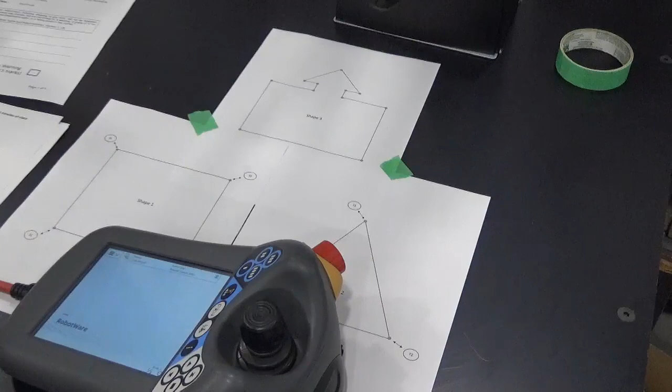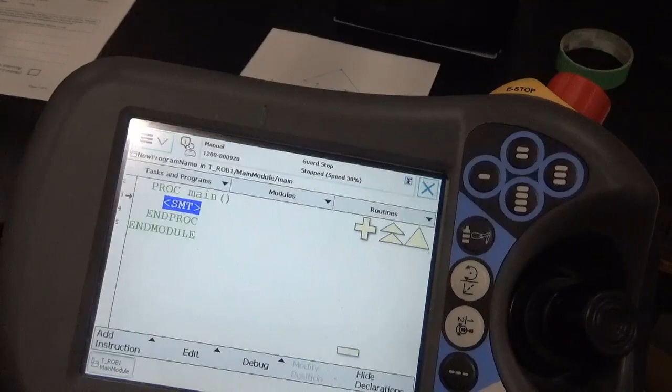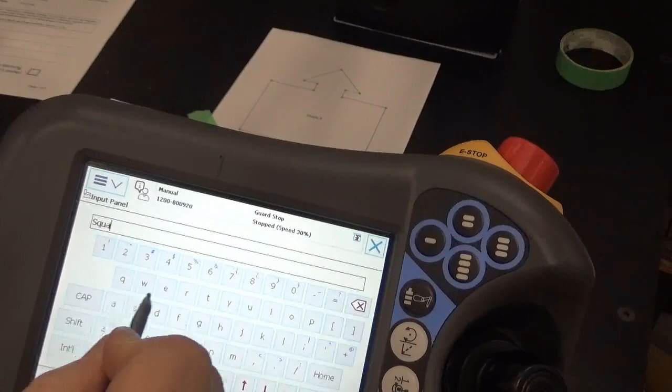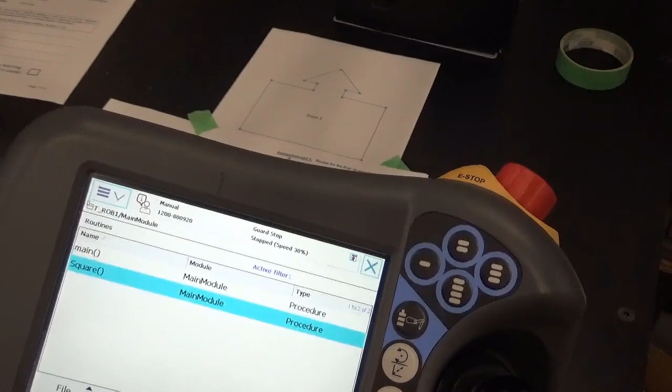Okay, so this is going to be a run-through of lab number 3. So, as it calls out here, we are going to start with selecting the program editor, selecting routines, and then file and create a new routine. This new routine is going to be called square. And then we're going to say show routine. The routine is going to look like this.

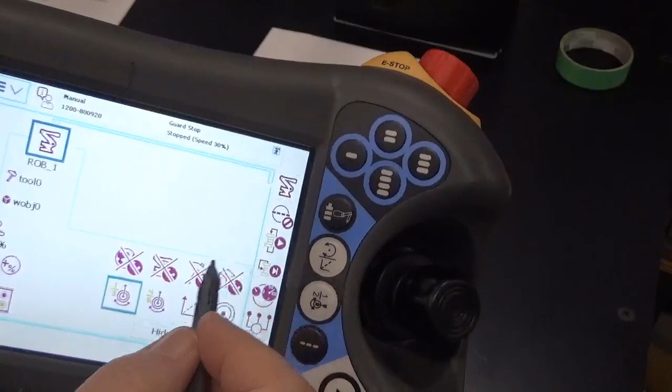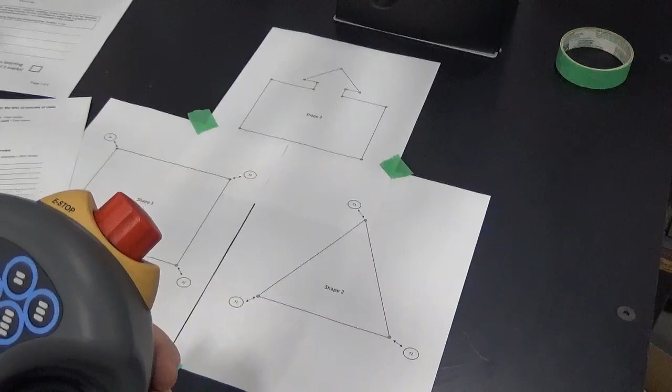Okay, now next we have all our shapes taped down over here. We are going to jog the robot around to make sure we can actually reach all the points on here. So let's go into our jogging menu. I'm going to make sure I am on no increments. And I'm going to start off, as always, by breaking the wrist to avoid singularity. There we go. My joysticks were all locked right now; it was left unlocked from the last lab. So I got my wrist down in a good position now.

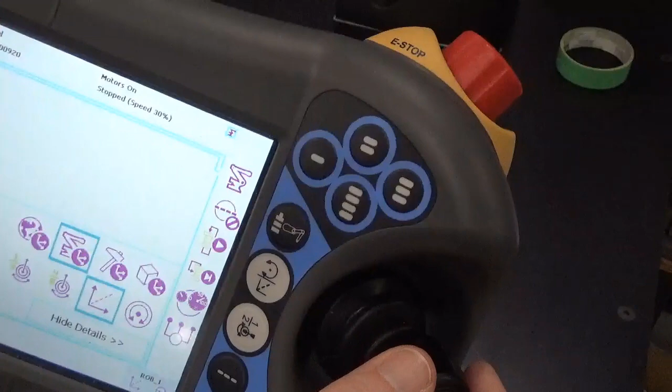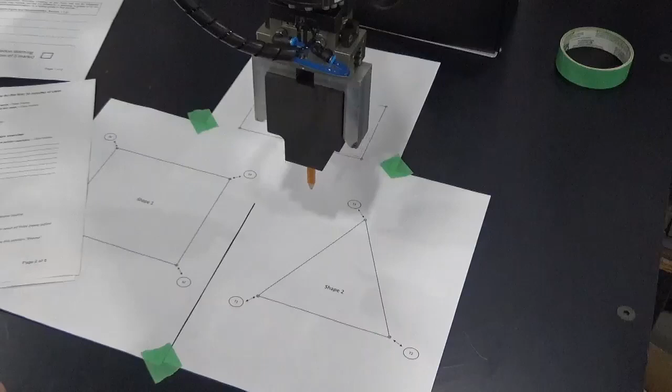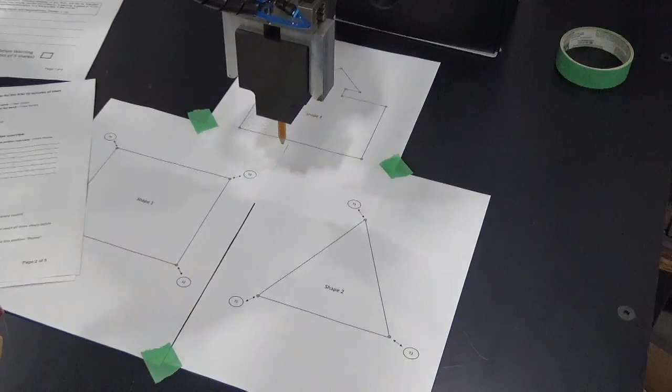I'm going to switch to linear. And I'm actually going to bring the robot over here and just see if I can actually reach all the different points that I want to try to get to. So could I actually reach as far as I want to go? And what we're going to see is that's about as far as I can go in Y. This is about as far as I can go in X. So I've actually taped these things in a spot that I can't reach.

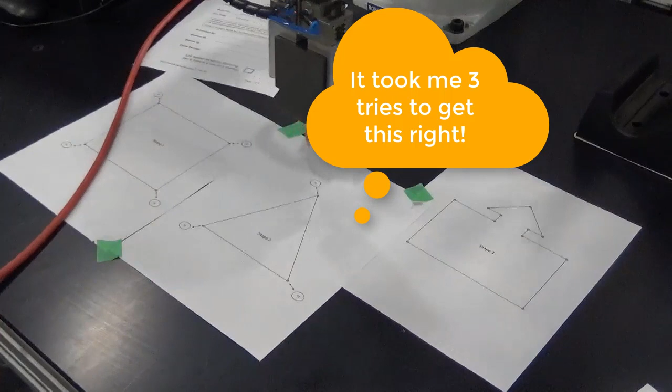So let's make sure that is fixed. Okay, that I can actually reach. So there we go. I can actually reach everything that I need to get to. Okay, so that's good. So let's carry on from here. Next thing we're going to do is define a home position. A home position that's good for all of these shapes would be something that is up above all the shapes and kind of centrally located. So let's call that right about here. That looks good. So I jog to that position, and now I'm going to create that home position.

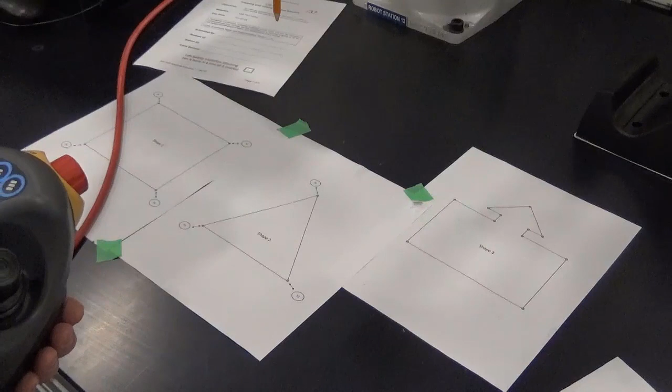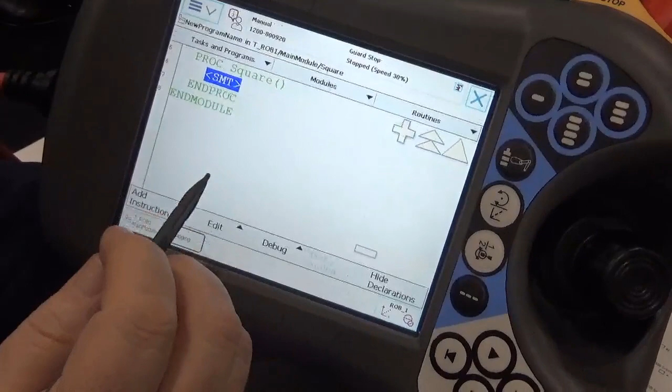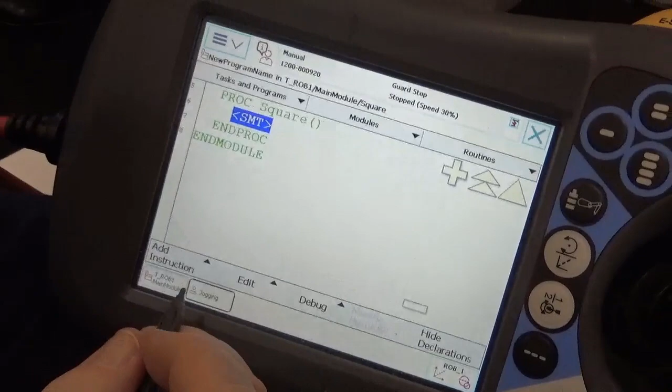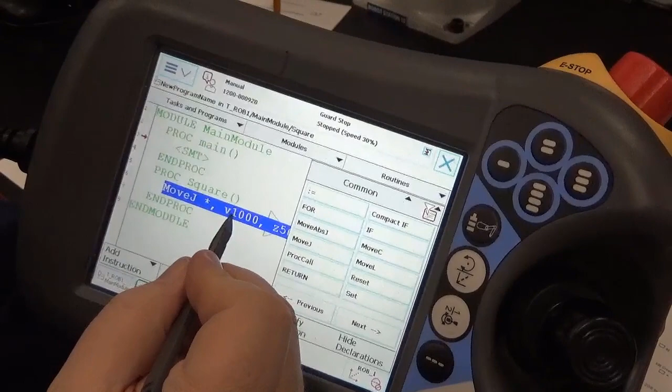In my square routine, I'm going to go back to my main module here. So in my routine that is square, I'm going to create this position. I'm going to do a MoveJ to this position and call it home. So I'm going to say add instruction, MoveJ, and then I get this coming in. So you'll see this, MoveJ star, the default speed that it does is V1000. See how I can select each little part of this. It's kind of tricky to do, but you can see that's the tool, that's the zone, that's the speed.

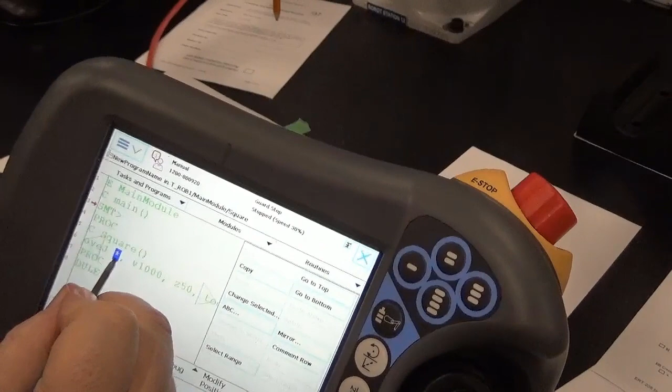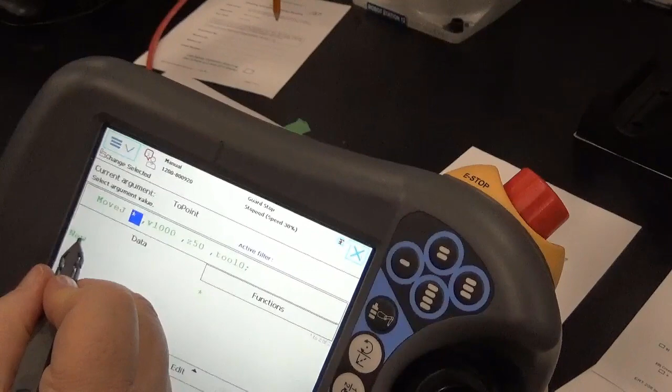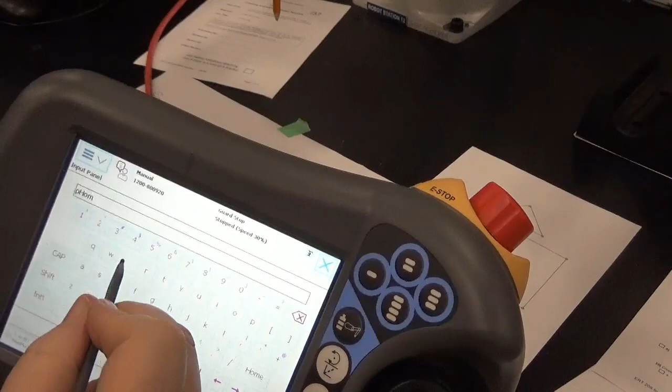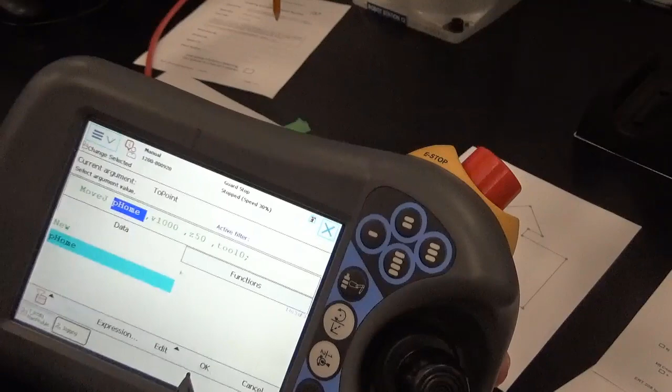I want to change this, so I selected that star right now. I want to say change selected. So I want to say this is a new. And when I create a new, it's basically going to create this point that I have right now. The default value is always going to be P10. I'm going to change that, and I'm going to call this P home. So remember to always rename your points as you create them. So this is now moving to P home, which is basically the point that I am at right now. And that is in there right now.

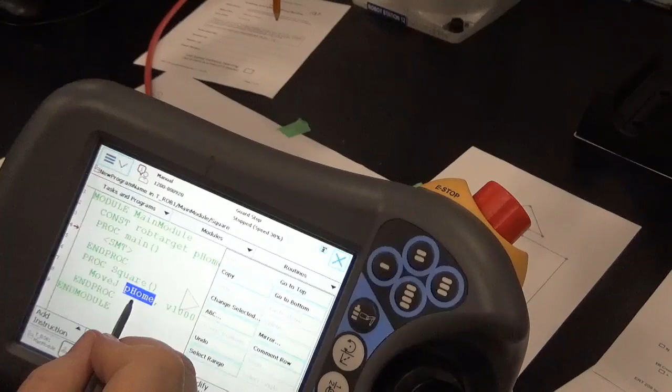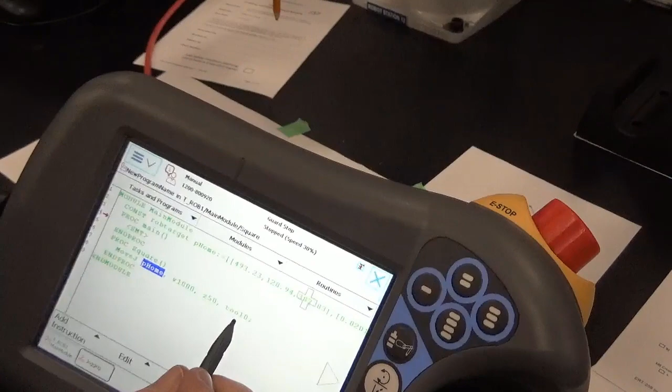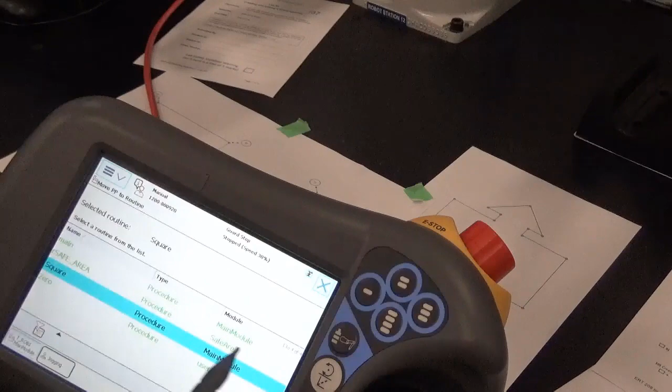So if I now go to my routine, if I say debug, I'm going to crush this down a little bit so I can see it better. My square routine now has one line of code in it, which is a MoveJ to P home, velocity 1000, zone of 50, tool 0. So let's see what that does if we actually run it. So if I jog off of here, and just jog over to here, I'm going to now say debug. I'm going to do a PP to routine. What routine do I want to go to? I'm going to say square.

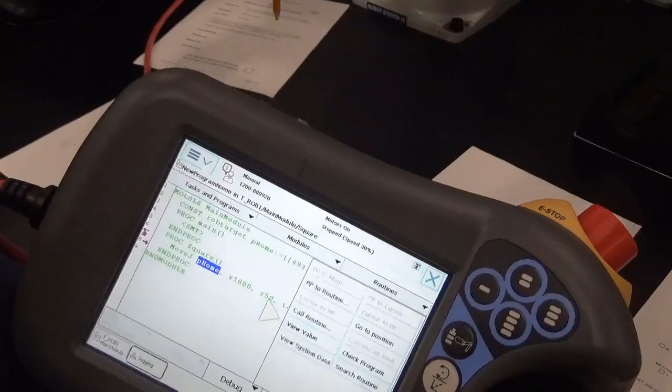I'm in my square routine now, and I'm going to play this routine. I'm just going to play it by stepping through it first. Stepping only goes one line at a time. So I'm going to say go to that point, and it is now moving to my point. You can see the little robot icon indicates where you're actually at. The pointer icon shows what the next line to be executed is. So it moved to that home point. And that's basically the way that we program this. We're going to repeat that process for all the different points on the square.

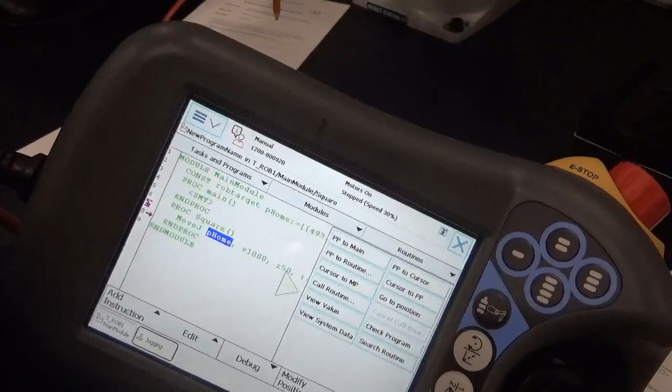So that was our home. The first one we're going to go to is going to be called S number 1. So we're going to jog over to S number 1, which is going to be over here. So in our linear mode, we will move downwards. I'm going to go about an inch above the paper.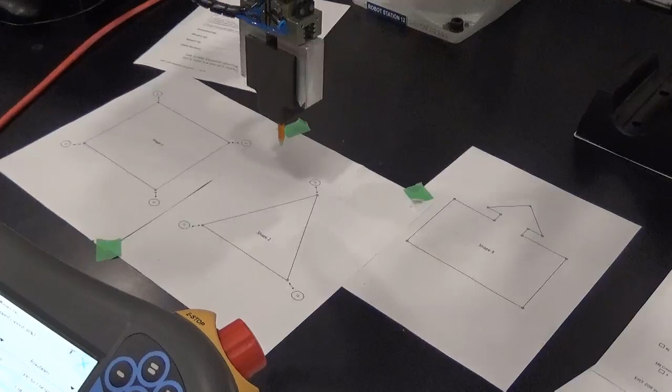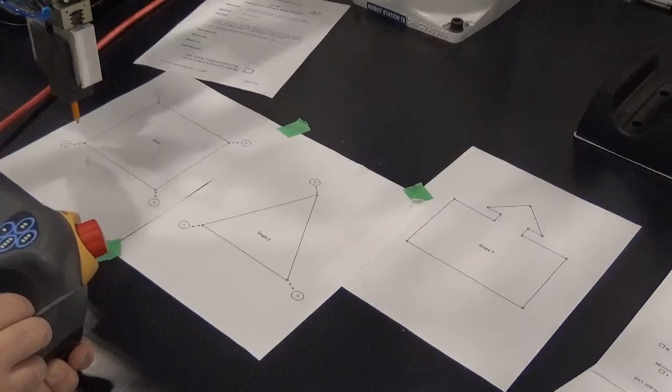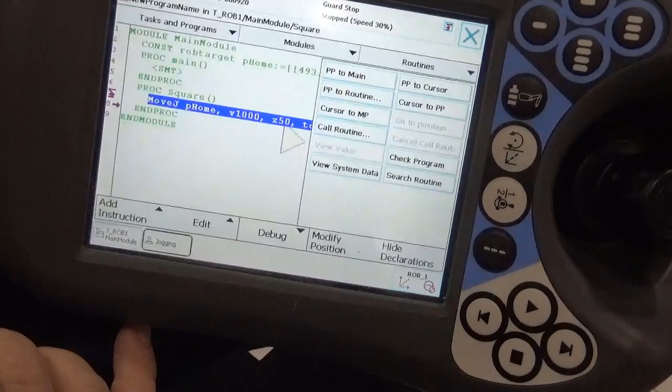And jog over so I'm above S number 1. Eyeballing pretty well. And then what I'm going to do is I'm going to get my cursor here on my code, which is now move J P home. I'm going to say add instruction. I'm going to do a move J.

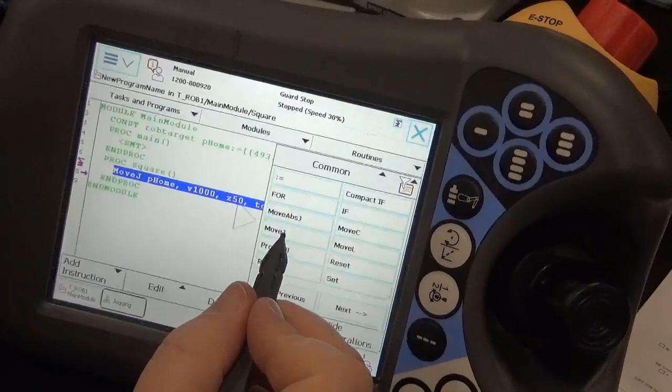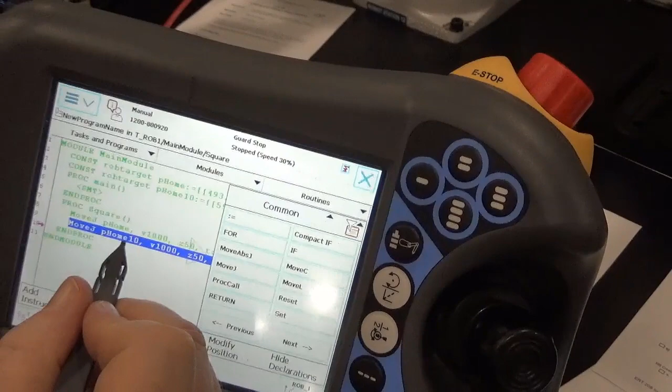You want to insert it above or below? I'm going to say below. So what that should do now is put in a new one right below my old one. It has now defined this as P home 10. Okay, just doing a move J to that point, calling it P home 10.

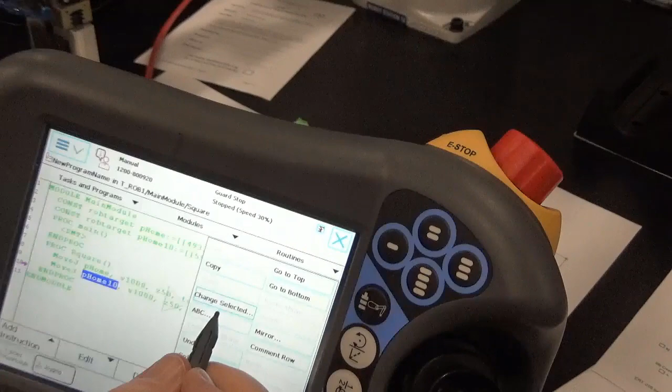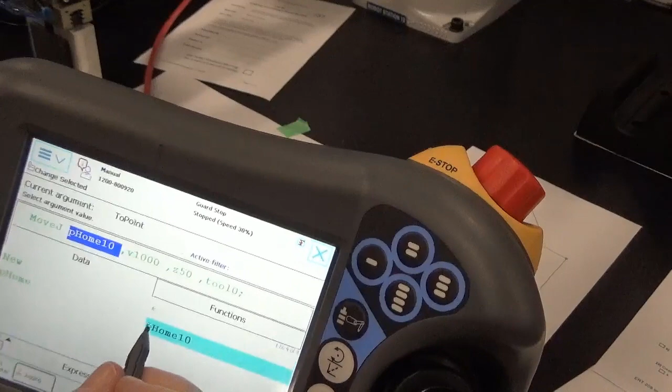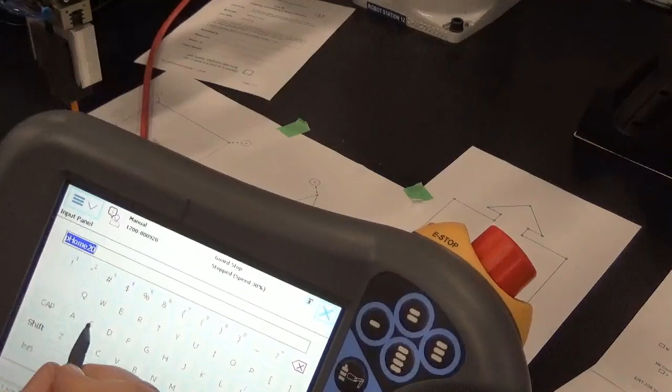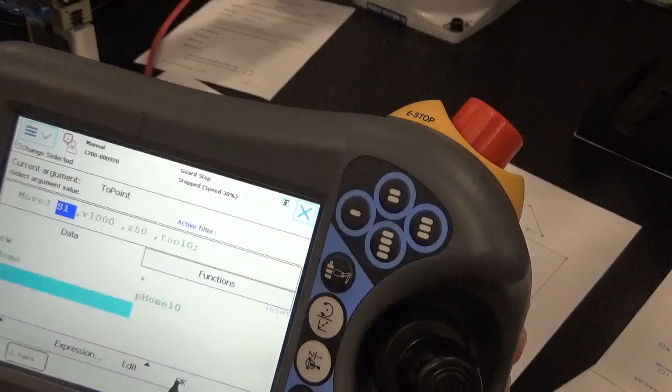Now we don't like that name P home 10, so we're going to go into edit. I'm going to click off this and click back on. I'll say edit, change selected, click that point, P home 10. I'm going to say edit that. Actually, I'm going to say new. I'm going to call this S1. Now this is my new point that is defined as S1, and we're going to say OK. So that point is now called S1.

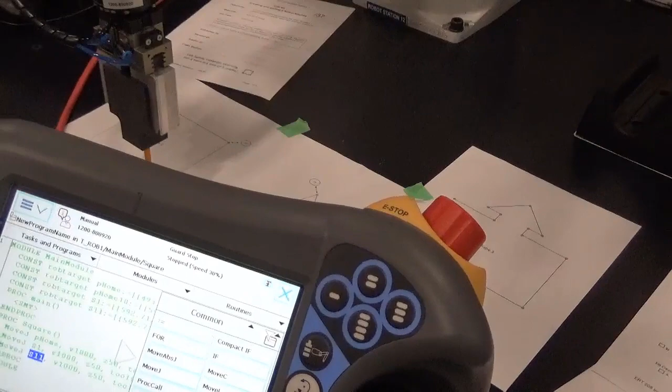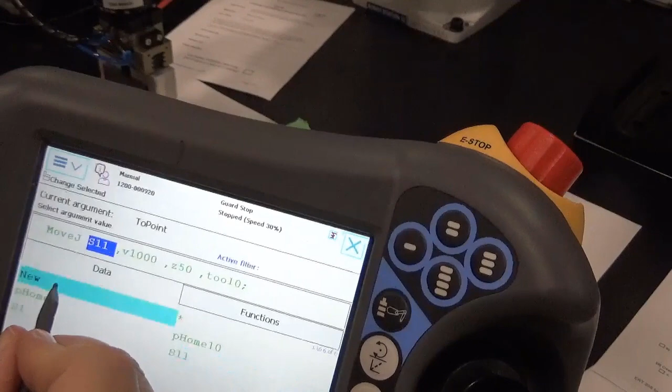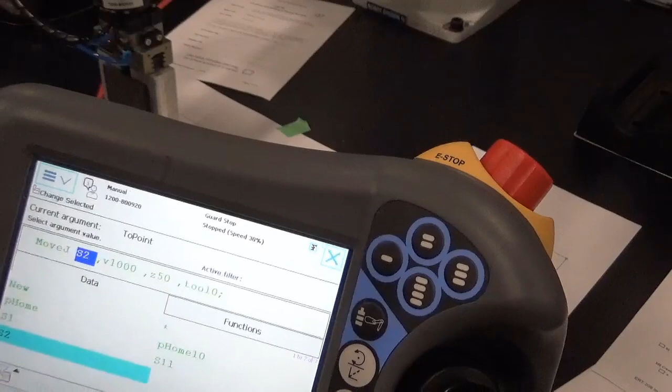I'm going to repeat that process now. So I'm going to jog over to S2. Right about there. I'm going to say add instruction, move J. It did this one. I'm going to click off, click back down here. I'm going to say edit, change selected, new. I'm going to call this S2. Okay. Okay. And I now have from home to S1 to S2.

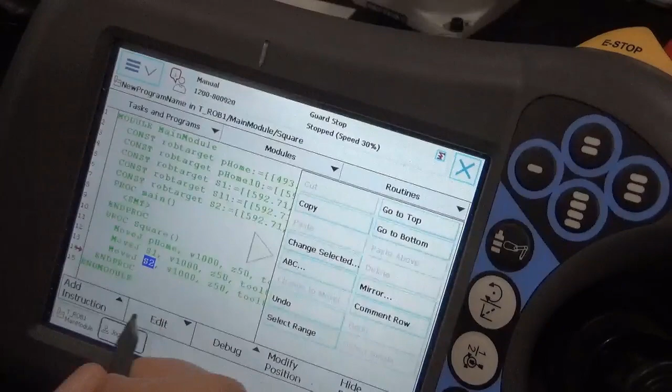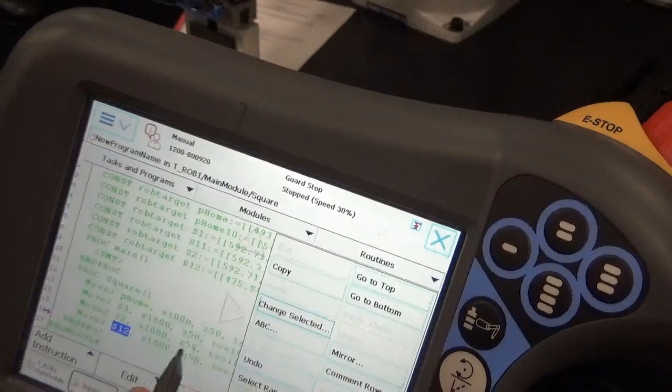Let's jog again back here. I'm in the good position. Let's say add instruction, move J, click off, click back on again, edit, change selected, give me a new point. Let's call this S3. Okay.

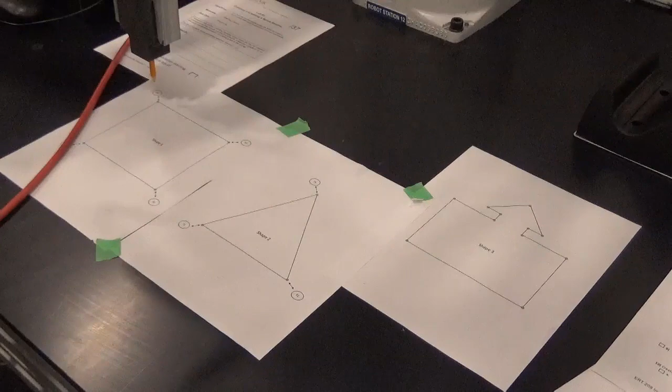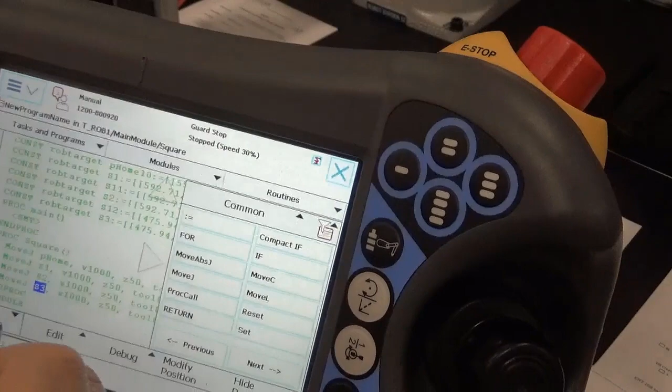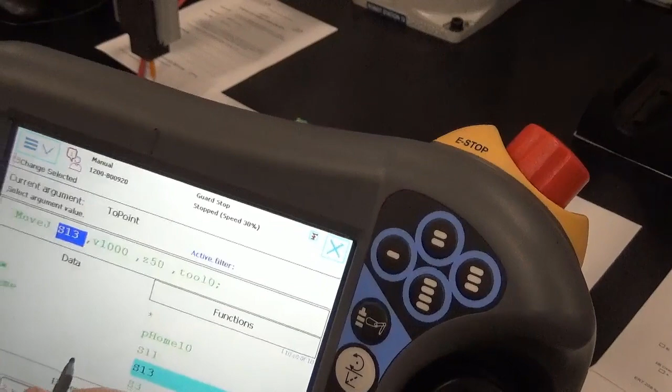And move once more. There we go. Add instruction. Move J. Edit. Change selected. New. S4. Okay.

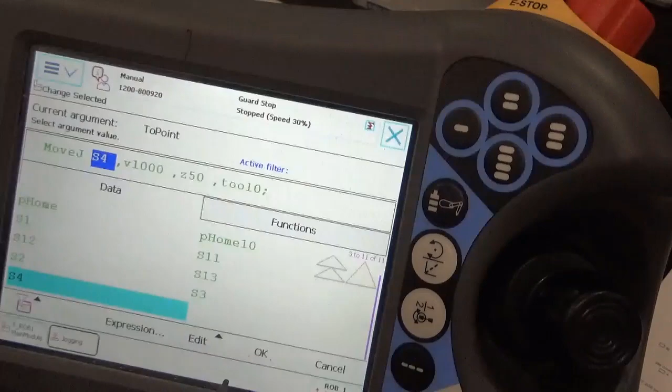And okay. The very last line we want to do, once we're here, we want to return back to home. Now we've already got a move J to home in here, so what I can do, I can just go to this line. I can just say I'm going to copy that whole line, and then I'm going to paste it back down here, and that pastes that line right back at the end again. So I should have move to home, move to S1, move to S2, move to S3, move to S4, move to home, and go back to home again.

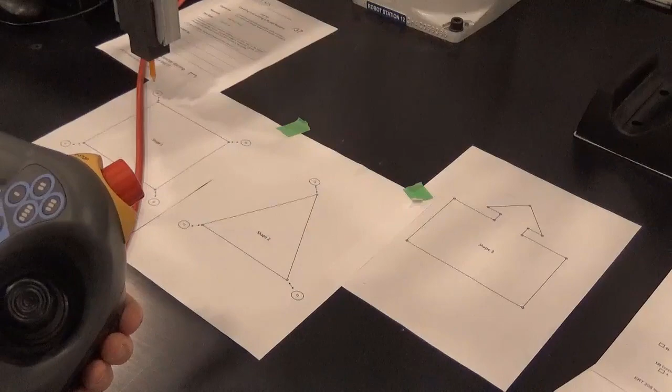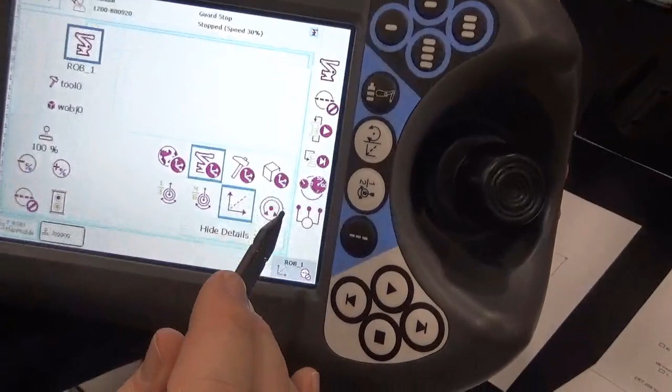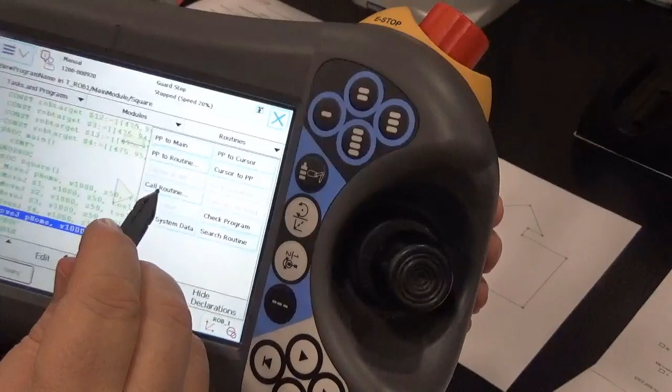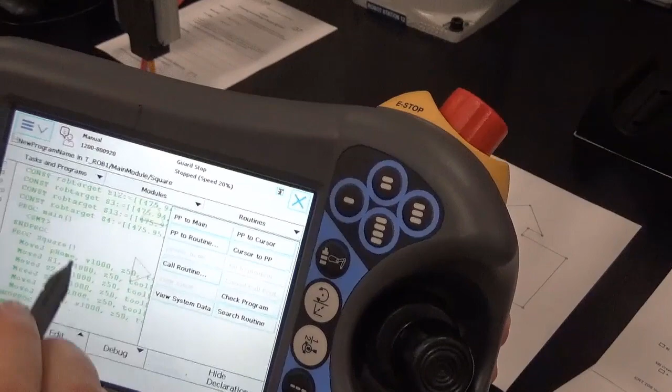So now the lab says, let's change our speed to 20%. So let's go over to here. Let's change our playback speed down to 20%. And let's try playing this back. So let's go to debug, PP to routine, square, puts us right here. We're going to say hide the declarations. You can see at the top here, the declarations are all of our points that have been stored in here. We're just going to hide those so it only shows the code.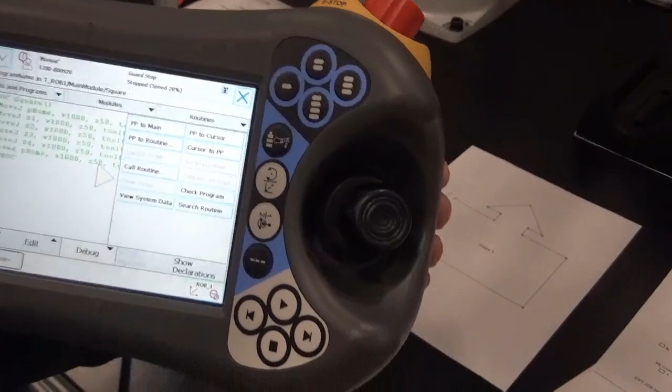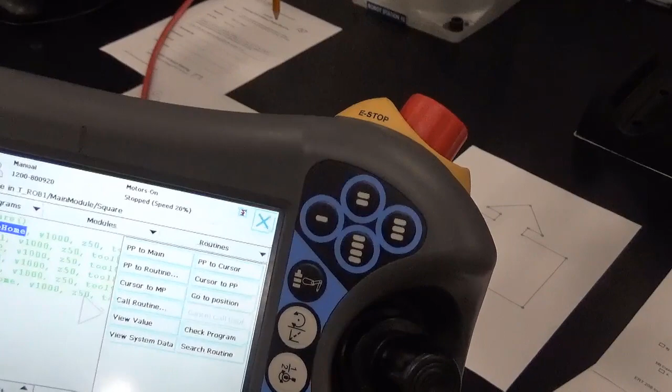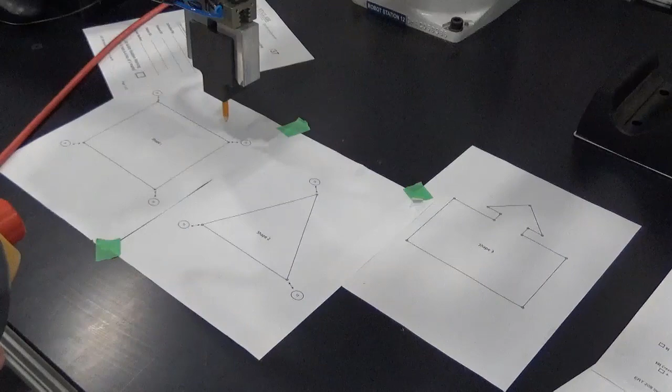And we're going to try stepping through this program. So we're going to hold down. We're going to use this step button here. So step should go up to. And we can see our robot is here. Our pointer's here. And our step is now going to take us from home down to S1. This is doing a joint move to S1. We're going to do a joint move to S2, a joint move to S3, a joint move to S4, and then a joint move back to home.

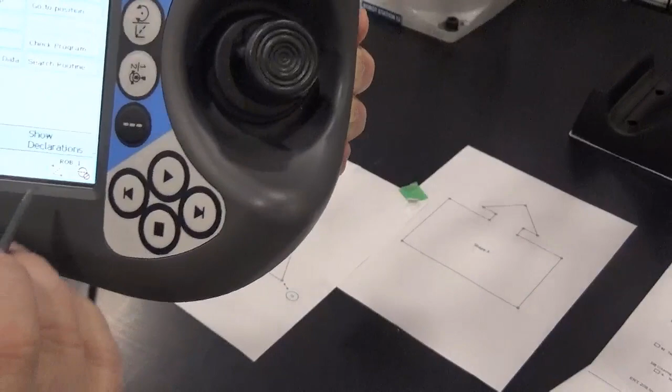All right, so that is our program. Now what we're going to do, let's turn our speed back up to 100. And let's actually run that in full playback mode. So we're going to use this button this time and run that in full playback mode and watch what it does. Now it is going in continuous mode right now, which means that it is just going to get to the bottom of the program and continue to loop.

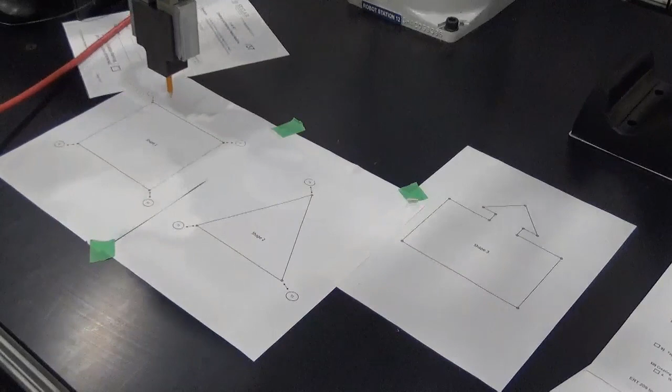Okay, so that is our program. That is the basic structure for creating one of these programs. And if we want to stop, we can just hit stop at any point here. If we hit play, it'll continue. We can also hit stop and then step it through in the step mode. All right, so that is running our programs.

So that is creating a routine, creating joint moves, and teaching points. That should be the basics of how we need to get through this lab.